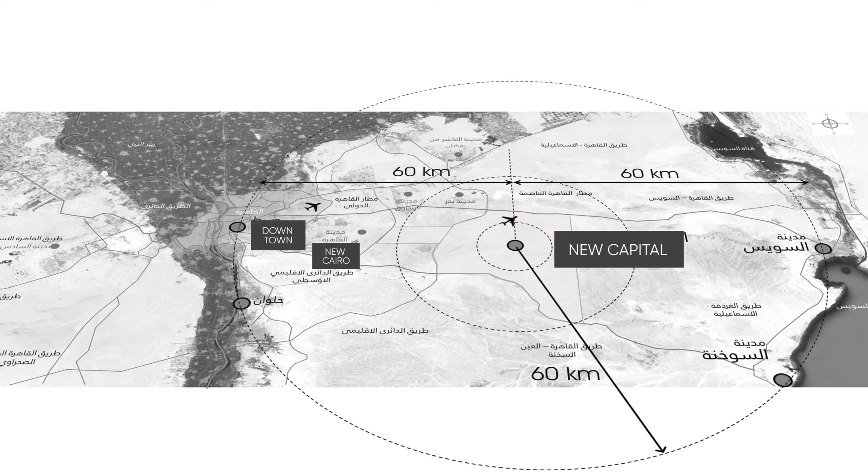Now, we had to choose the city and its location. All of the available cities had potential. However, to change the center, you need to change the literal center. And so the center of the country, the new administrative capital, was chosen.

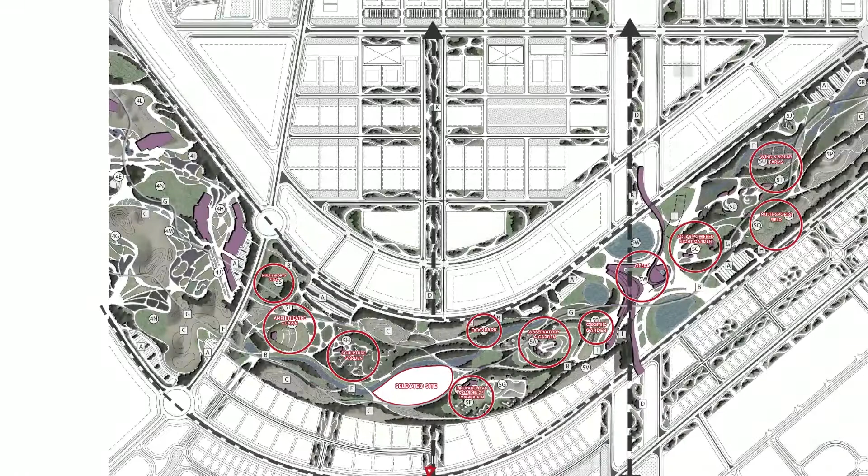Within it, the spine of the city, the Green River, was chosen. And finally, the exact center of the Green River was chosen as a site for the building to act as a metaphor and literal center for the community. Also, it lies within the Science and Technology Park, which goes with the theme of IoT.

Now, the land plot is overlooking a river to its north, with a residential development to the south. It also lies on the secondary northern-southern connector, close to the government district.

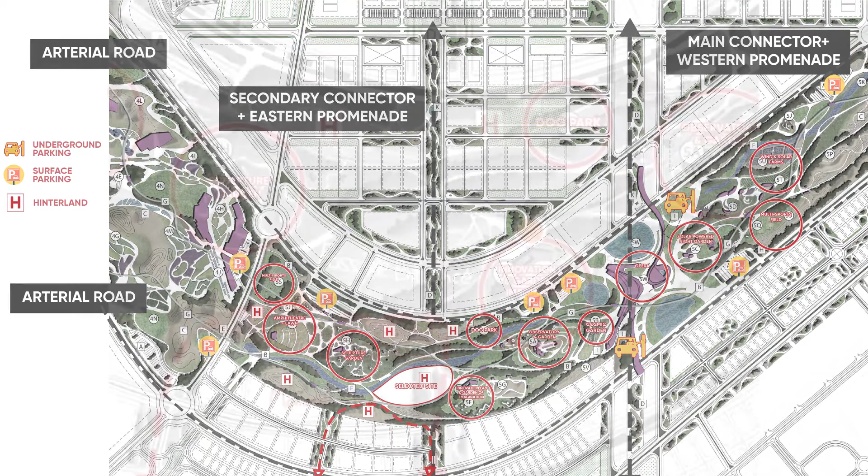Now, lying within the Green River, obviously it's not accessible by car. However, the Green River's monorail system has 2 stations on the plot's ends, which are connected to parking lots outside. And so the plot's entrances were chosen close to these stations. A fleet of autonomous golf cars will be used to transport visitors from the station to the project.

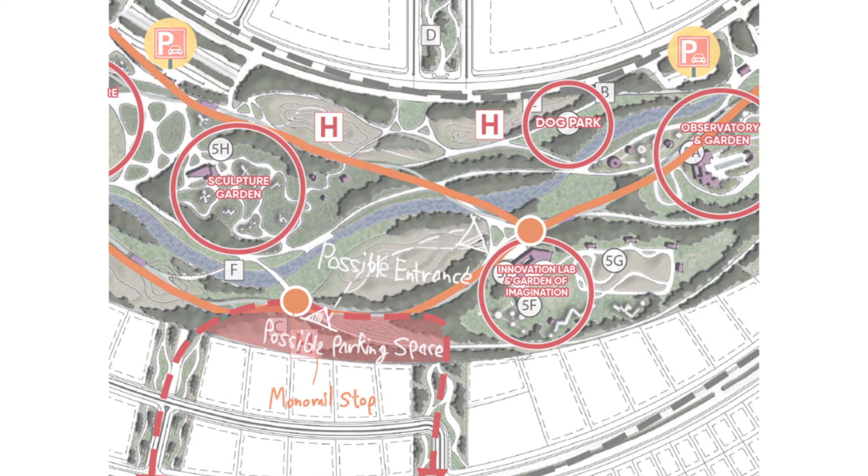The project was planned to house a plethora of uses, with the mosque housing a Quran school and a fatwa center, a religious center split into a da'wah center and a pilgrimage training center, a community center with housing, feeding, and rehabilitation for the poor, an Islamic arts center, and an administrative center, an educational center with class labs and lecture halls, and finally a commercial center with shops and restaurants.

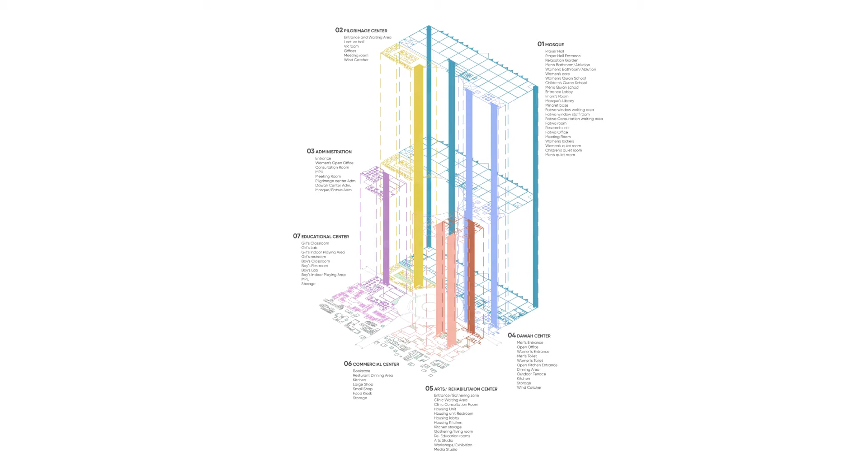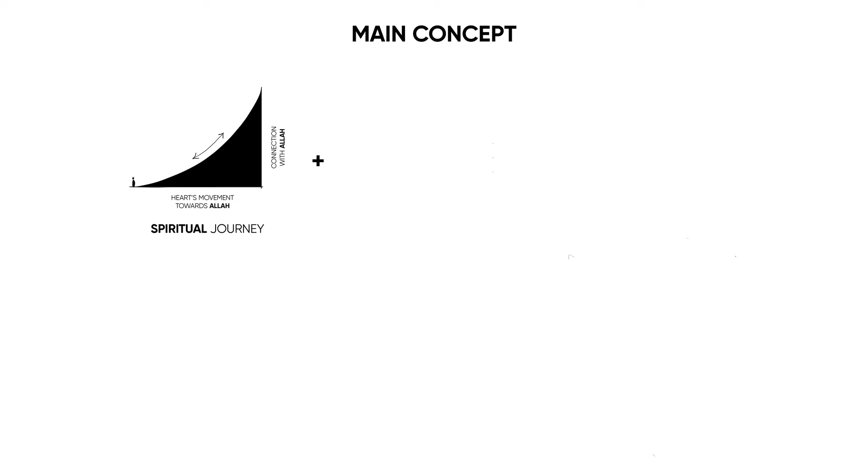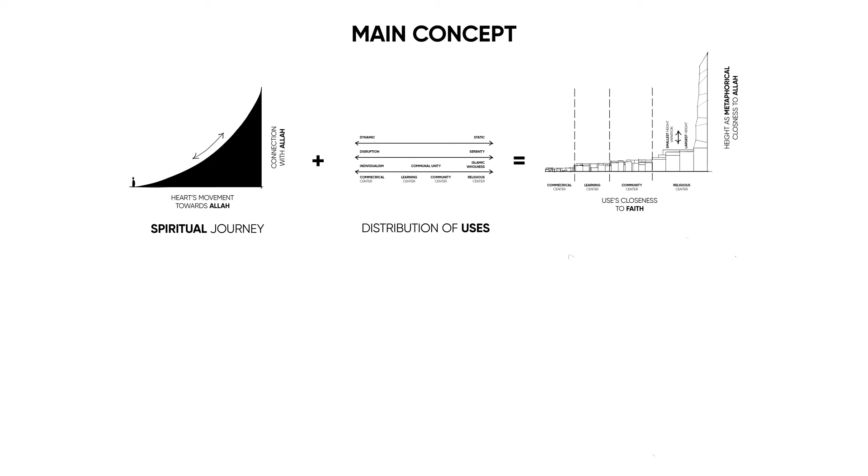The project's concept is inspired by this variation in uses. It represents a journey towards Allah, and this journey is materialized through the journey through the uses. There are 2 extremes: the religious center on one side, representing Islamic wholeness, serenity, and is static in nature, and the commercial center on the other side, representing individualism, disruption, and is dynamic in nature, with the community center and educational center shades in between, representing communal unity.

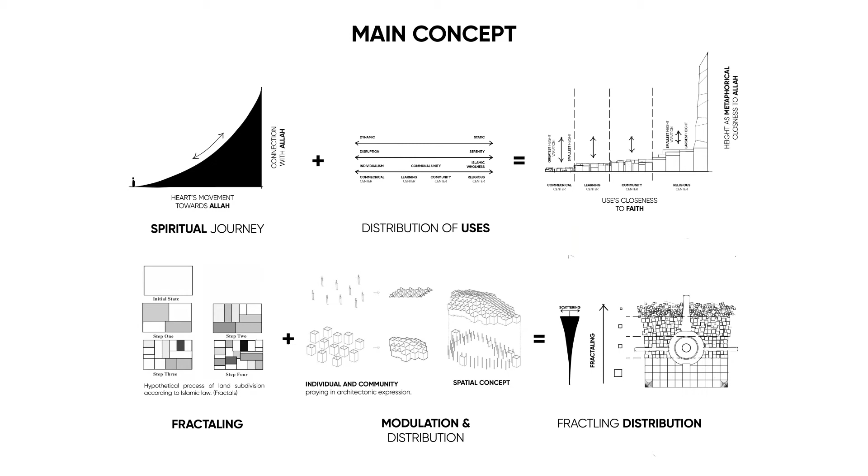A modular unit was chosen representing the individual. When stacked together, they represent the community and its state in a specific zone. The closer you are to the religious center, the higher the height, with little variation within it, with larger modules and the more uniform the distribution. And the closer you are to the commercial center, the lower the height, with greater variation within it, with smaller modules and less uniform distribution.

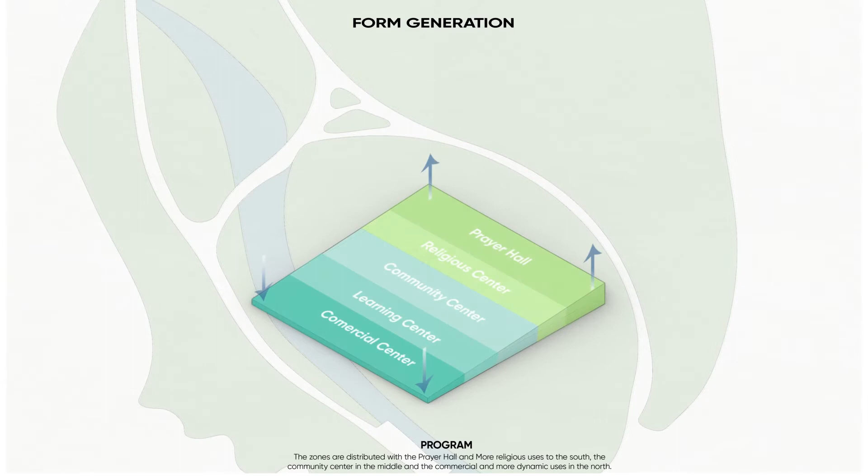The main volume is extruded based on the required area for the building. It is then slanted in order to vary the height based on uses. The volume is then subdivided into modules, fractaled, and then offset as if in motion based on its location on the use axis.

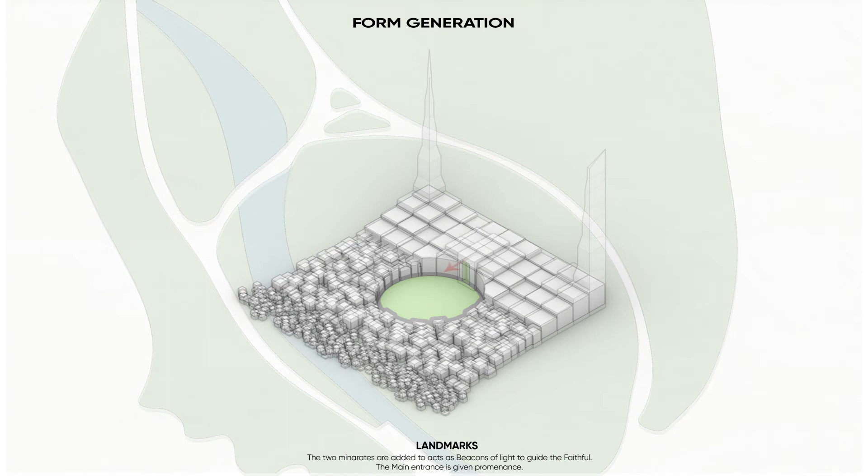A courtyard is then carved in the middle of the building to act as its beating heart, carved as a circle to signify the wholeness of the community, reflected in the perfection of the geometry. 2 minarets were added to act as beacons of light for the faithful. The entrance to the religious complex is given prominence and offsets the cylindrical void. A garden with a pool of flowing water is added at the center of the courtyard to remind the faithful of their hereafter in heaven.

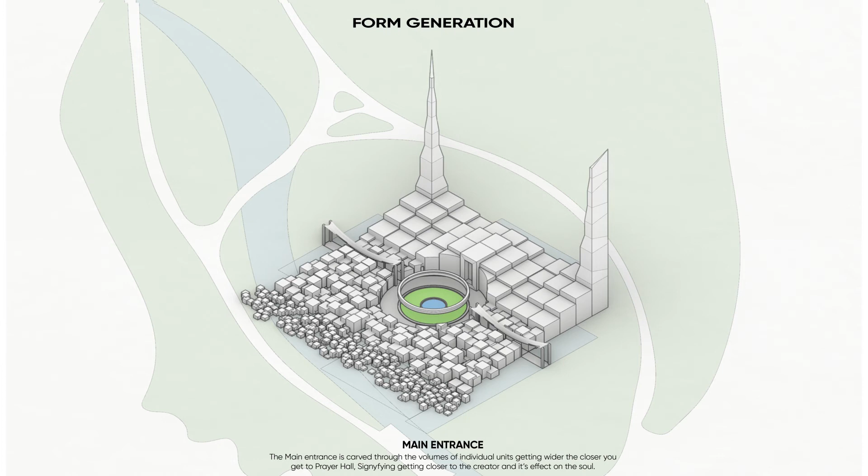The main entrance is carved through the volumes of individual units, getting wider the closer you get to the prayer hall, signifying getting closer to the Creator and its effect on the human soul.